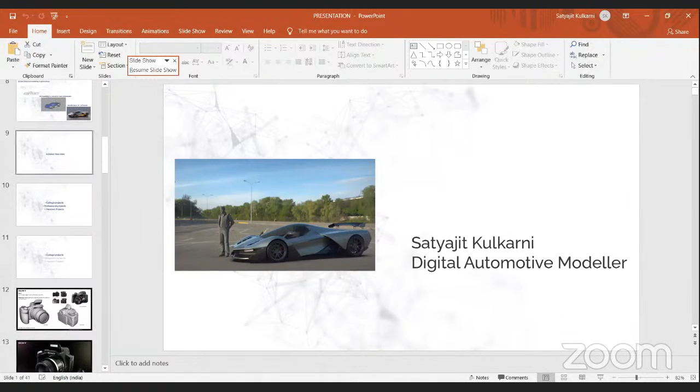Okay, so the video that you saw was for a software called Autodesk Alias Studio. So in my presentation, I will be going through my projects from college, my professional projects and my personal project. So let's start with my college project. In the beginning, we were told to study existing objects and to replicate the same object in 3D software. The software is not just used in the automotive industry. We can use it anywhere we need to create nice 3D sculpted shapes.

So our first assignment was to create a camera, and after creating the camera, create all the details and then import that product into a software called Maya. In Maya we can add colors and lights, and then you get a photorealistic render. This is not a photo, but a render created by Maya software. In this software, we can put textures, lights, shadows, text, anything. Sky is the limit.

So this was one of the most important projects in my college life. There was a Ferrari design competition held in 2011. 50 colleges from all over the world participated in this. Our college was one of the participants. We were one of the finalists of this competition. This was the car that we made for the competition.

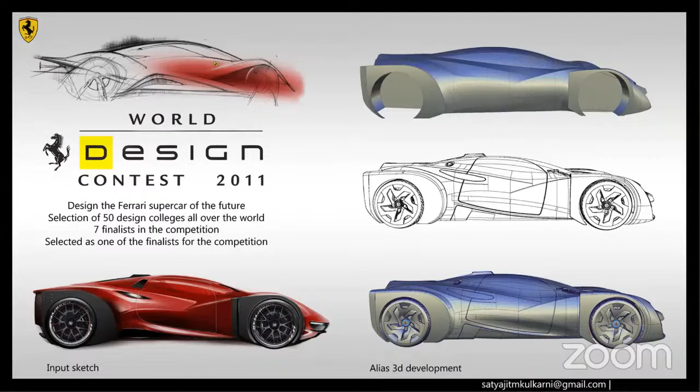And one of my friends, Adhiraj, helped me to model the car. So we did a 3D model from scratch. On the left side, you will see how it looks as a primitive model. And as it progresses, slowly we add on details. Every single thing has to be made in this software. Every single nut and bolt you see has been manually modeled by us.

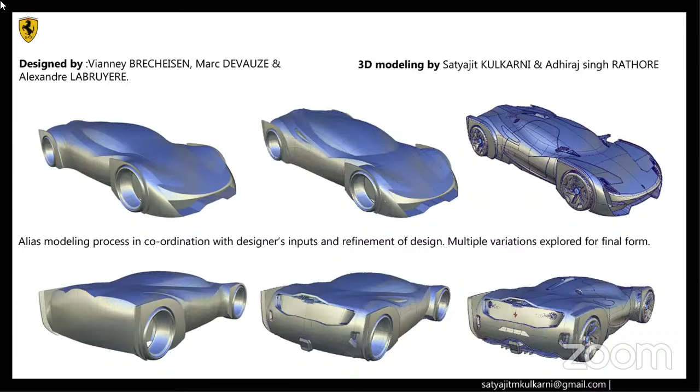After this, you have to present it to a team, and it's called a communication render, and that is also handled by the Maya software. So a huge poster of this car was made in our college, and we also sent this data to Ferrari in Italy. Sadly, we did not win the final round, but in our college, this was very well received.

The concept of this car was that at high speeds, the black part that you see morphs and changes shape. Let's see if something like this happens in the future. We also had a visit from a Swiss watchmaker and Louis Vuitton and a product designer from France. I was the team leader in this project, and they wanted to design a luxury watch inspired by the Lamborghini Reventon.

So again, this is how we work in the Alias software. First, we make a volume, then slowly we start giving it some shape and then adding small details. Once the volume is made, we can share this file with the whole team, and they can keep on adding details on their own. This is one of the advantages of 3D software. You can move the data through the whole team, all the team will assemble small parts, and in the end, we get the finished product.

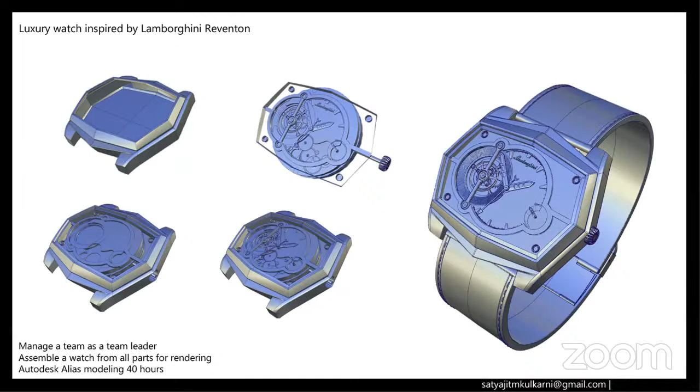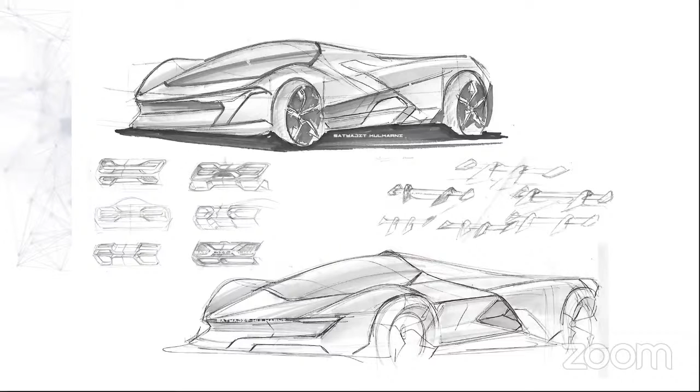So I'm not a classical transportation designer, but I am more of an Alias modeler. So these are not the best sketches that I have right now, but these are some of the sketches. There are hundreds and hundreds of sketches that I made. So the basic concept of this car was an enclosed cockpit like a jet fighter, and the driver is sitting in the center, and there are two big engines on the side from which the air is taken in, and it gives the effect of a jet fighter.

So this was the project that I did in the lockdown period. Each and every line has been remade, let's say at least 10 times. It never happens that you just press a button in this software and the car is done. You have to create a line, then look at it from every angle in 3D, again change it, again look at it, again build some surfaces, again analyze it from all the angles, how the light is flowing.

So if you see the black and white image on the right corner, that is called a zebra shader in the software. This shader is used to analyze how the light flows on the car. So if you see unbroken black lines, that means your model is good. If you see the lines are breaking somewhere, that means it is not good. How the metal will react in real world.

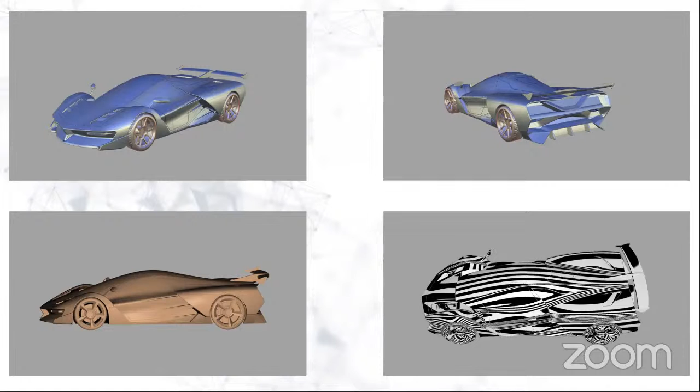On the left side, there is a brown model, which is a clay shader. So this is how the model will look as a clay model. Most of the car companies in India use this method. In this, you have to pay attention to the dark and the light areas, how they are balanced, and that is how you study a clay model.

So after modeling, we import the 3D model into a real-time rendering software. Now this is a very good new area in which quite a breakthrough is happening. In the real-time rendering software, you import your model and you just assign colors. In Maya, it was the old school method in which you created the color, you created the reflection on the color, you created the bump map, how scratches will look on it, and then you applied it. Then you created artificial lights. But with the new generation softwares, this can be done in extremely less time. This was the effect that I got.

So I published this concept online during the lockdown period. This was extremely well received by a lot of people from the industry. A lot of people from existing car companies messaged me online and said this is a very good concept. Two designers from a big company said this should be a reality in India, and let's hope it gets noticed by some people up there in the industry. Let's hope we see an Indian supercar on the roads.

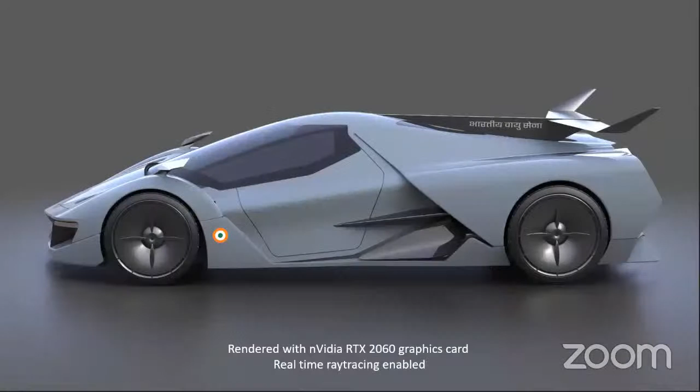And what will the Indian Air Force version of this car look like? So this was the idea that I had in mind. And what is RTX actually? This is revolutionizing the automotive industry on a big scale. 10 years ago, when you imported your model into a rendering software, you had to wait for a few hours to see the output. The software used to calculate light, shadow, everything. It took hours and hours. But now, thanks to the new technology, which is called real-time ray tracing, it happens in a few minutes.

Now, just to give an example, this was done on a classical graphic card, an old generation graphic card, GTX 660. This took 35 minutes to render. The new graphic card did this in 4 minutes. That is how the industry is advancing. That is the speed at which the industry is moving ahead right now.

So with this model, I hope I can inspire the future generation of designers that is coming, and maybe we can see a supercar that is made in India in the future. So in a nutshell, if you want to become an automotive designer, or any person from the automotive industry, any designer like a CMF or a UI UX designer, all you have to do is create a new experience. That's it, nothing else.

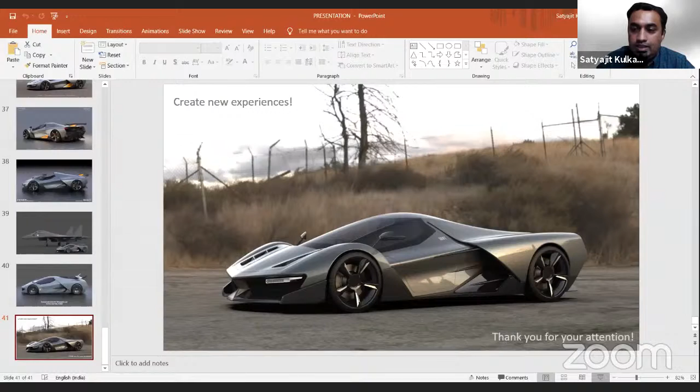Then we have a question whether a supercar in India will have problems with speed bumps and careless driving from other people. Of course, it will have, but we have to thank Mr. Dilip Chhabria for what he has done. He has already experimented with the Avanti, if you know the DC Avanti, and it has not faced major problems in India. Also, there are a few rich people who enjoy Lamborghinis and Ferraris in India. So yes, it is possible, but not on a large scale.

Okay, then related again to your supercar project, someone named small citizen is asking, when are you planning to release? But I think you already mentioned that you're trying to push this to whoever could help you move ahead with the project.

Then Chaitanya is asking, how did you get an SUV look and feel on the Renault Kwid? And one more question: how long did you spend to design the Renault Kwid's first version? Okay, so from sketch to the production model, the Renault Kwid took 3 years. I was one of the Alias modelers on the team, so I did not have sketching inputs on this car, but I did have 3D modeling inputs on this car.

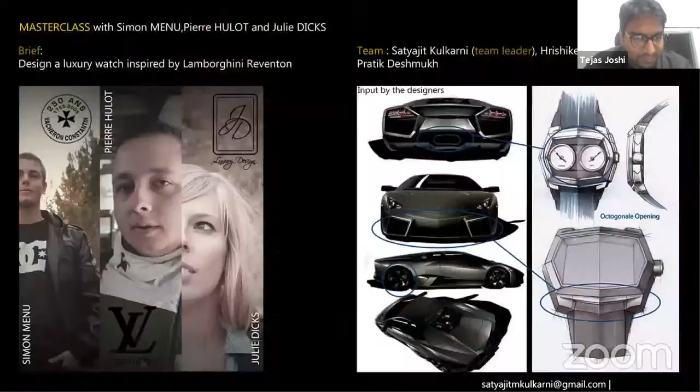Then again, we have a question about your fighter. What would be the approximate cost of the fighter? It entirely depends on what material this car is made of. Nowadays, there is a company called Koenigsegg, if you know. It's a Swedish company. They use carbon fiber on their car. Carbon fiber is extremely expensive to make. The material, I will give you an example.

If you just take out the bolts and nuts on the Koenigsegg, which are made of titanium, only the nuts and bolts of the entire car, they cost 80 lakh rupees. And if you have to put 80 lakh rupees worth of nuts and bolts on the car, you can imagine how much the rest of the parts will cost: the engine, the body, the tires, the rims, and it goes somewhere to around 10 to 15 crore rupees. If the material used is of low quality, then it can be maybe a few crore, 1 or 2 crore rupees. It entirely depends on the material.

Okay. Again, a question related to the same car. Is the fighter electric or petrol or diesel? What have you thought about it? Yes, good question. So this is an electric car, and it has quad motors, two in the front, two in the back. So now this model is supposed to make 1000 horsepower, and it is easily achievable for an electric car. You will see the new electric Hummer made by General Motors, which is making around 1000 horsepower. So this car will be electric, and electric cars are extremely fast.

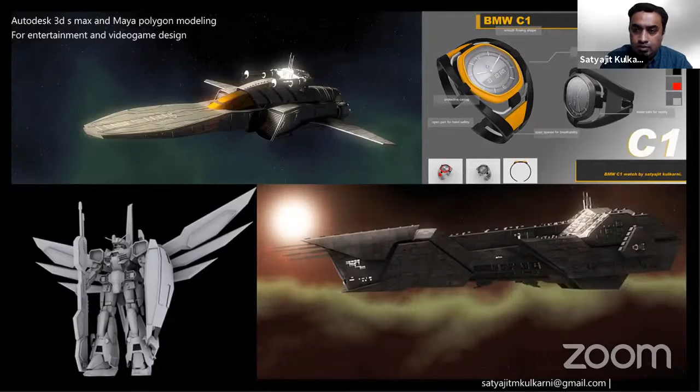So when you have to transfer data in the company itself, like I have shown here, from one department to another department, it should not be corrupt. Maya's pipeline is so strong and robust, the data never fails. So the data I have built, when I transfer it to, let's say, the USA, when they open the data in the USA, it will be the same data. The same level of robustness or trustworthiness is not there in Blender right now. But in the future, yes, definitely companies are looking into Blender and they might use Blender. Okay.

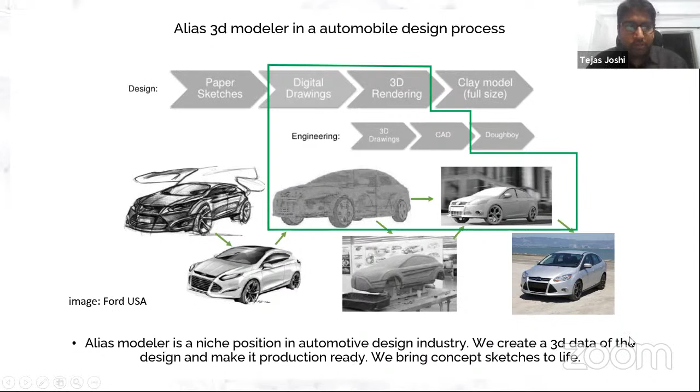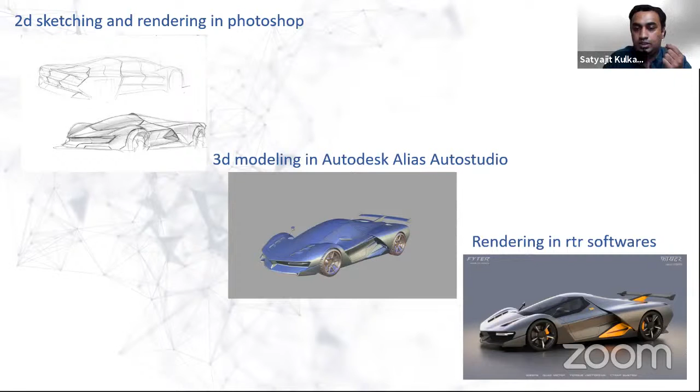Then we have a few more questions. One is, what is the future of digital sculpting in the automotive industry and why Alias? Okay. Now Alias creates one of the lightest files by size on a PC. If you compare a CATIA file and an Alias file, there is a big difference in the file size. Alias has a mathematics called NURBS, non-uniform rational B-spline.

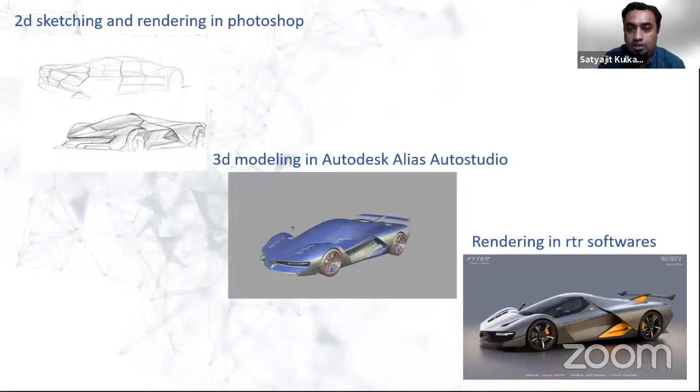So this mathematical model creates a very light and very beautiful looking model. Now, if you see on the production cars, the highlights that you get on the surface, they are very important, and Alias delivers accurate results with minimum file size. So Alias is a preferred tool in the industry.

Okay. Then, do you think physical clay modeling is still required when we have sophisticated digital softwares to model the car? In this clay model, you can actually see how the model looks in the natural light and in the real world scale.

In the digital model, you have to take a little bit more expensive path in which you have to install a big virtual reality facility at your design studio, and then you have to wear the goggles, and from that you will get an idea how the car will look in real life. But the clay model, it will provide the feedback instantly in front of you. So I don't see clay modeling going right now. It will stay there unless virtual reality catches up with clay modeling.

Okay. Then we have a question saying you have worked with Indian companies like Ashok Leyland and Mahindra, and also with international ones like Suzuki, Renault, etc. What are the unique differences you found between the two? It's a good question. It finally comes to the budget each company allots to the car.

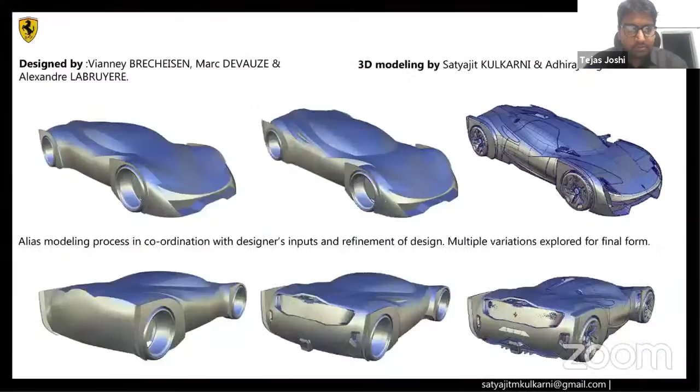So yes, the UI UX designer is now a special designer. It is a different field in the automotive industry, but it will increase, and the demand for such designers will keep on increasing in the future. Now, I hope that answers the first question. Yes. Okay, now the second question. So if we bring this car into production. Yes. So how do you see to it that it stays up to date even after maybe 2 or 3 years from design to the launch?

Yes, which material are we going to use to make this car? That will define whether the car becomes a reality or not. If we use extremely exotic materials to make this car, then this will push the price above 2-3 crore rupees. Then we will have to think how many people will buy this car in India. But if this car was made in another country where there are customers for such cars, then yes, it has a possibility.

But again, when this data goes to the engineering team, they will test it and they will tell us that some parts need to be changed. So this will not look the same when it goes to the production level. Some parts will definitely change. Okay.

Then there is a question asking, have you worked with video games to design vehicles or cars? No. Video games use polygon data, and there is software called Unity and Unreal Engine. That is actually not modeling software, but it is used to create video games. So you need to have good skills in polygon modeling if you want to do modeling for video games. And no, I have not done it till now.

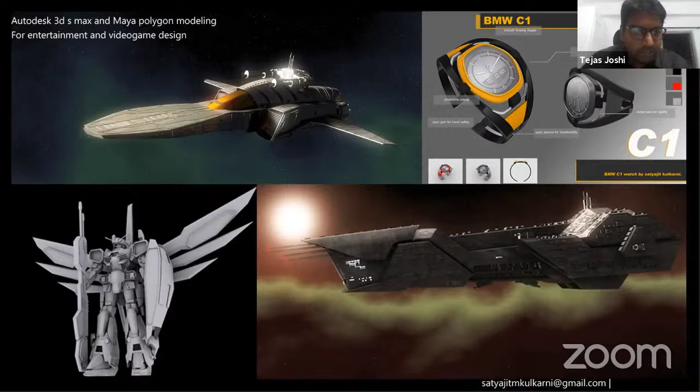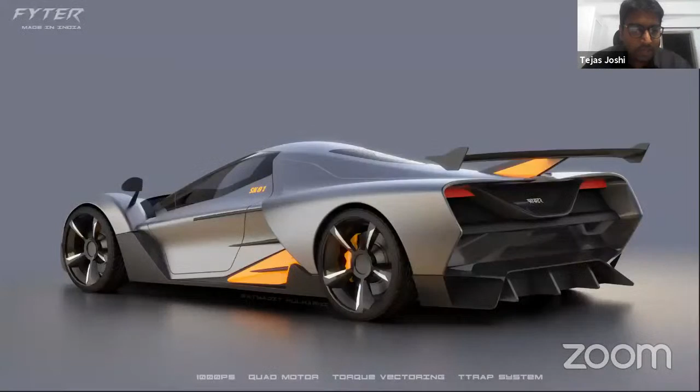Okay. Then there are a couple of questions again related to the Fyter, whether it is a one-seater or a two-seater, and one more question: when did you finalize the design of the Fyter, or could you show the interior of the Fyter? Have you worked on the interior? No, I have not worked on the interior because my expertise right now is exterior A-class modeling. I have done like 90% work on the exterior till now in my professional design career.

Let's say less than 5% of my work has been on the interior. So no, I have not designed the interior, and this was done in the lockdown period. And through this project, I wanted to show the skills that I have acquired through 7 years of my experience in the automotive industry. As you can see on your screen, there are 2 seats in this already.

And if you want to know further, it's loosely based on a car called the Pagani Zonda. The dimensions of this car are based on a car called Pagani Zonda. It is an Italian car.

Okay, then I just missed one question. The question was, have you experienced a conflict between designers and automobile engineers around acceptance of design style plan during your prototype preparation? Every day. The answer is every day. This happens because the designers, we like to dream a lot, and we dream that this will be a reality on the road, but it is not so.

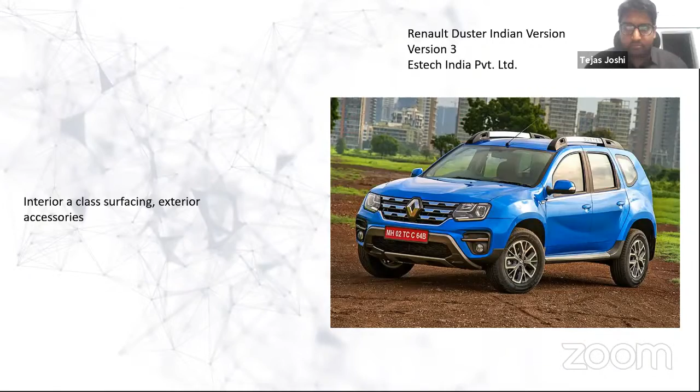So we can cover the front part of the car, and you will definitely see a different design language on the electric cars. So the classical problems of the internal combustion engine car, they don't apply to the electric car.

Okay, then we have a question. In India, we have so many professionals in IT, medicine, engineering, manufacturing, but when it comes to Class A modeling, we have very few resources. Do you suggest teaching Class A modeling in secondary school itself? Why not? Why not? But if the student is interested, definitely he should go for classes. That's why classes like DQ Labs and DYPDC exist to nurture the industrial design talent. Definitely, I would suggest to include this in school.

Okay. Then there is a question: who can learn Alias, or what are the basic requirements to learn Alias? You need to be creative. You don't need to be an engineer or a doctor or an IT professional to learn Alias. If you can operate a video game, you can operate Alias. It's that simple. It is like a video game. And when you learn some basic design, you will start to understand Alias much better. So a basic design education is recommended. Okay.

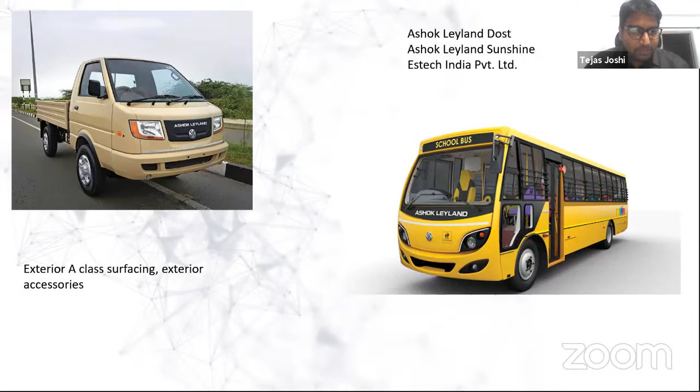Then we have a lot of questions coming in. What are your suggestions and guidance to become part of the booming design role? What are the skill sets that are needed? A creative mindset is needed. You need to be sensitive towards textures, colors, shapes, how the light is falling on a vehicle, or let's say any product. If you want to be a product designer, you need to be sensitive towards the design.

And you need to be interested. You need to be passionate, hardworking, and in this field, it is never like you will push one button and the work is done. It is not like that. You have to work very hard. Okay. Just an example I would like to give. When we were creating this car, I went 4 days without sleep in our college. This was our thesis project.

Okay. Then a couple of comments regarding the Fyter. The rear view mirror also resembles Pagani designs.

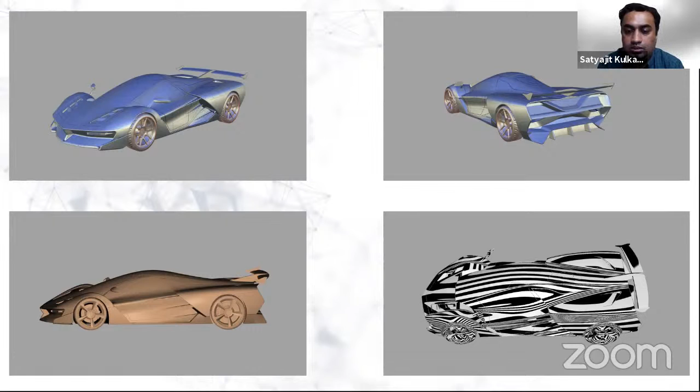Alias is a surface modeling tool. SolidWorks and Inventor are engineering software. In a surface modeling tool like Alias, the importance is given to how the surface will look under lighting conditions. In engineering software like SolidWorks or CATIA, when the 3D model is done, we can't actually judge how the product will look under lighting conditions, or how the surface will look in the real world. So that is why Alias is used as an industrial design tool.

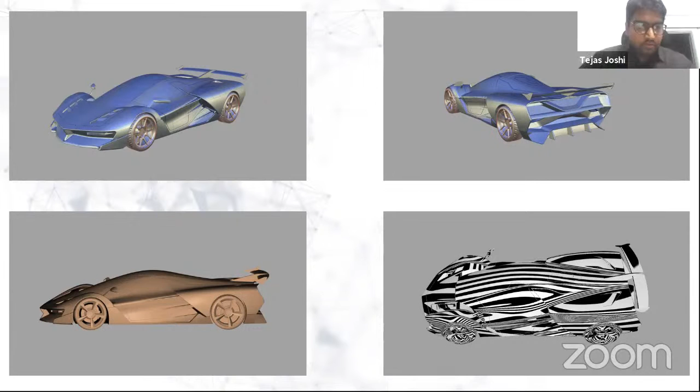Also, it creates extremely high quality surfaces. So now if you see the surfaces on a car which need very high quality highlights, these are called highlights, how the light reflects off a car. So you need that to be of extremely high quality, and Alias successfully delivers the end result.

Okay. I think there is a confusion between engineering software and design software. So the engineering software is used here, etc., and then the design software is used here.

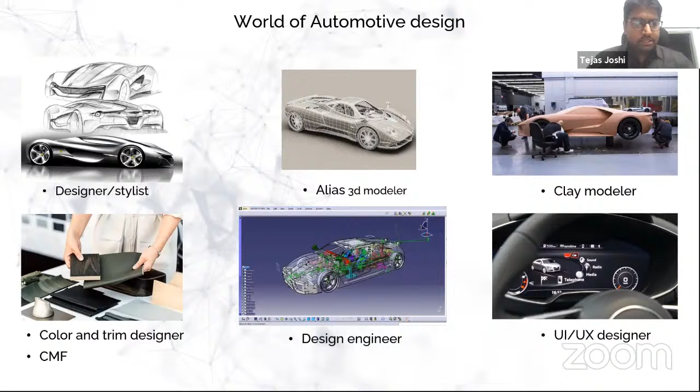Hello. Yeah. Okay. So there is a question asking whether there is a windshield wiper to the Fyter. Very good question. Very good observation. No, there is no windshield wiper to this car. So let's say I will model it very soon.

But now BMW has come up with a technique. They have developed a technology in which they vibrate the glass with some frequency, and because of that, the water never rests on the glass. So BMW is working on such technology right now.